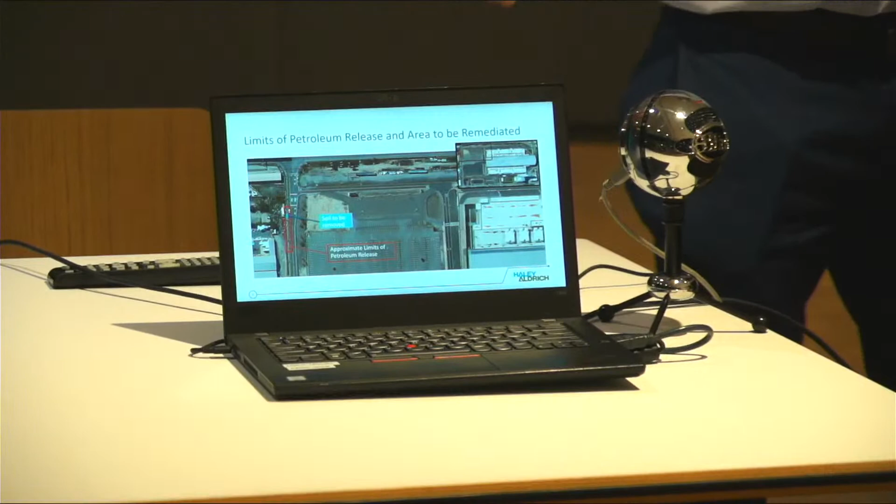So where are we on this one? Okay, this is going to be tough to see, but what we're here to talk about today is a release of petroleum, a historic release of petroleum. It appears to be a number 6 fuel oil. The number 6 fuel oil is very thick, heavy, viscous oil, think molasses almost, and it's not a very volatile compound, meaning it doesn't give off vapors. It's located in New Cypher Street. The limits of the release are shown on this picture in the red box, that's the limits of the release. And the small blue box is the area that we're going to remediate, and I'll go through why we're remediating just that area in a little bit.

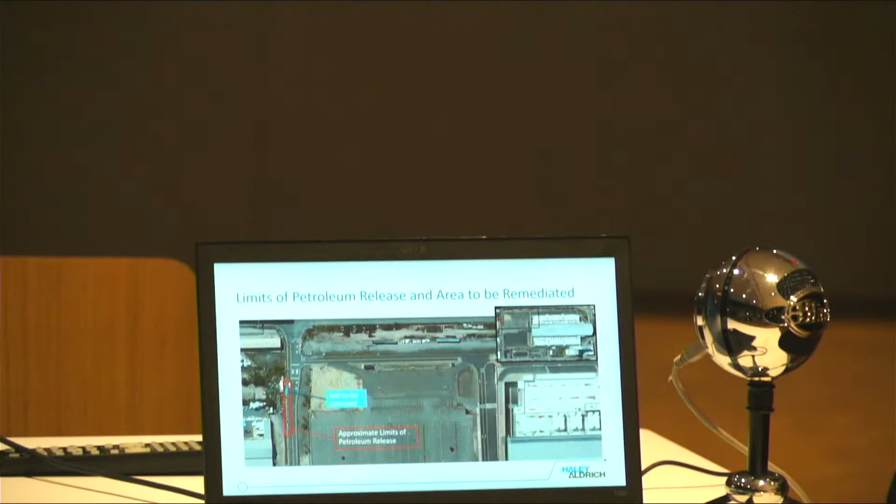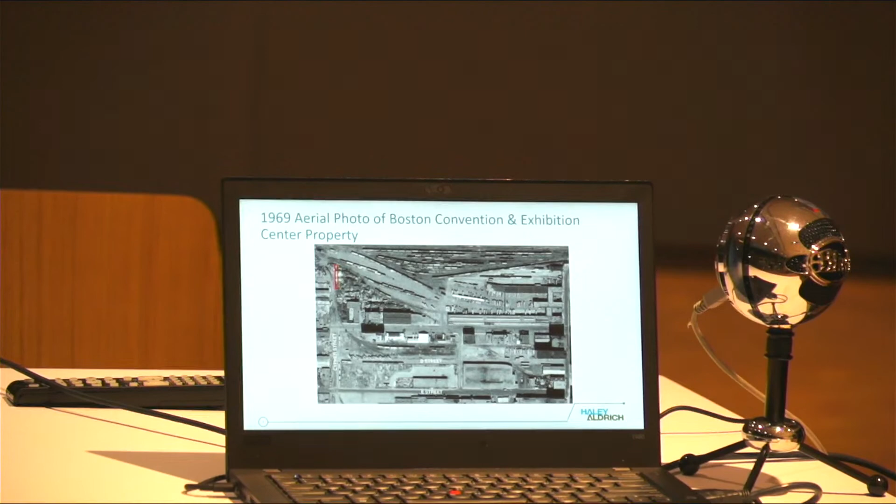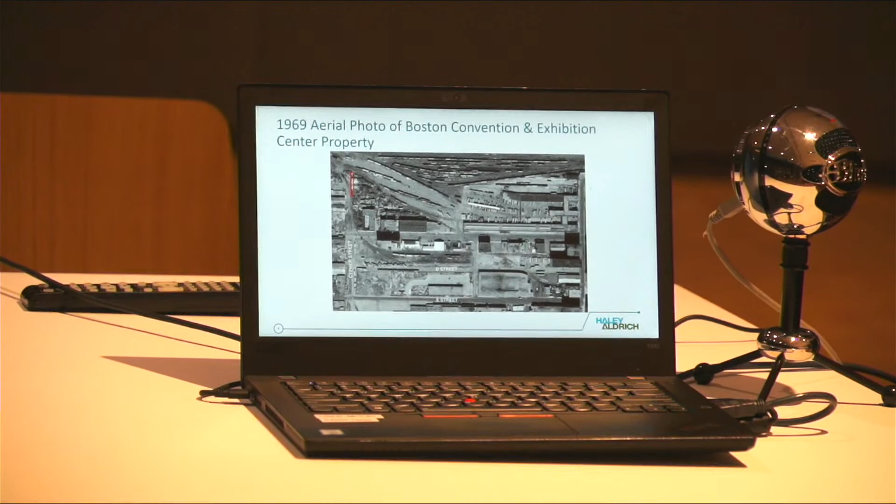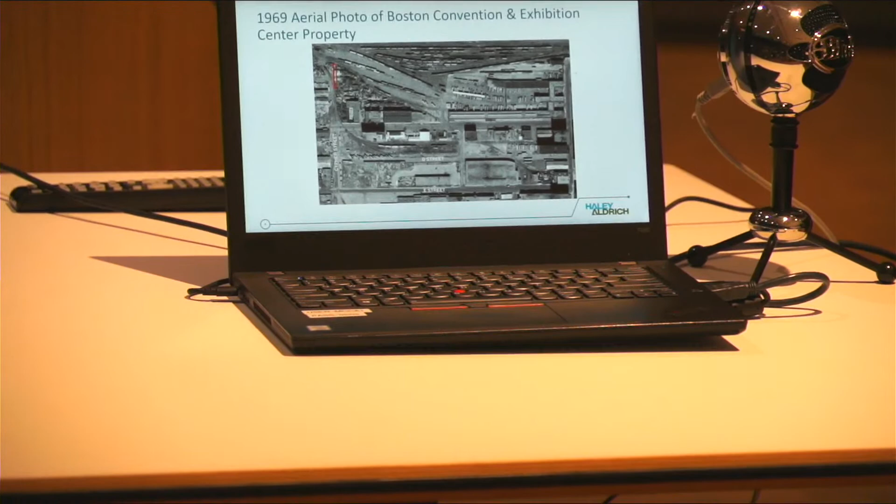So on the next page, the location of New Cypher Street and where this petroleum release is happens to coincide with the former Boston junk site that was here. It was a junk mill facility that would recycle transformers, and it was the place where transformer oil was released containing PCBs, and the location at which the MCCA did a very big cleanup in 2017. So it just kind of gives an idea of the industrial history of this area and where it's located in the past. It's next to these railroad operations, the junk facility itself, and that's likely the source of this petroleum.

So a little bit about the regulatory setting. This particular remediation is being regulated by both the U.S. Environmental Protection Agency and the Massachusetts Department of Environmental Protection. The EPA's regulation falls under what's called the Toxic Substances Control Act, related to the PCB release that was previously cleaned up. There's still residual PCBs in the ground, so whenever we manage those soils, we need to work with EPA and within their framework to do that remediation.

We notified EPA of this work back in 2022. They understand what we're doing and have agreed and approved it. We just need to send the closure documentation when we're done. The soil out there, the residual PCBs, are underneath the asphalt cap that surrounds, that is beneath a lot of the south lot in New Cypher Street. It's called the EM1 cap, for exposure mitigation cap.

The other regulatory authority overseeing this, and really the primary regulatory agency for this particular release of petroleum, is the Massachusetts Department of Environmental Protection. They work under the Massachusetts Contingency Plan regulations, and we reported this release to them in 2017. Since that time, we've done several investigations, and we submitted a remediation plan to Mass DEP in 2023. Though they don't approve these plans, that's where I come in as a licensed site professional. I have a license to render an opinion that we've designed this remediation in accordance with the state regulations. DEP, of course, can review it, audit it, tell us no, you're not, ask us to do different things. But in this case, we have not heard from Mass DEP on this, so it is considered a presumptive approval.

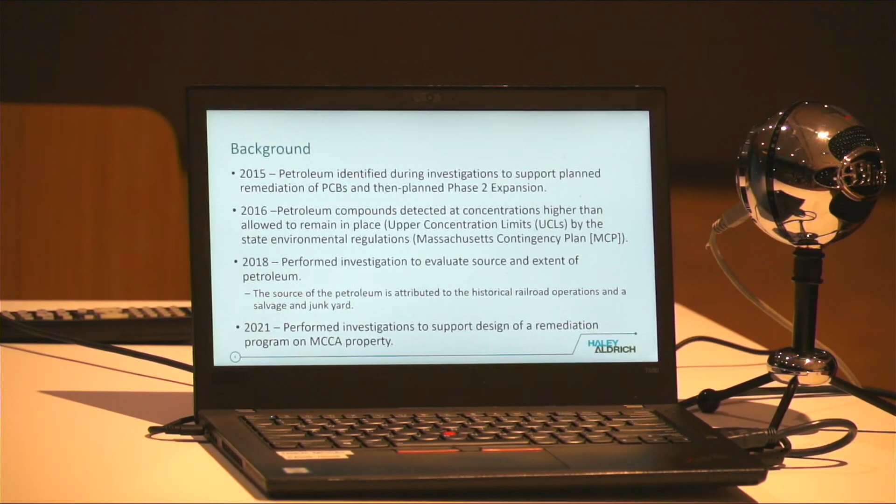All right, so a little bit about the background of how we found this release. In 2015, Haley and Aldrich did some investigations in the south parking lot in New Cypher Street for the planned expansion, the Phase 2 expansion of the convention center at that time, as well as to remediate PCBs while that construction was going on.

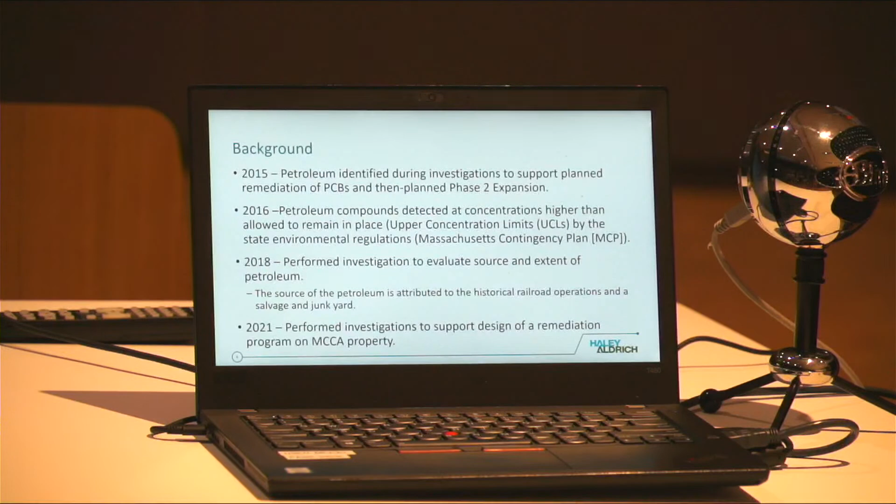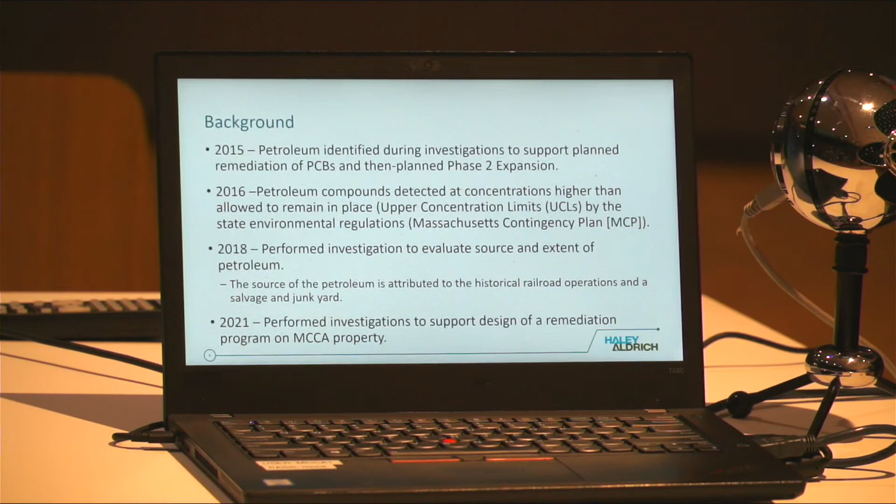During those investigations, we did find some isolated areas of petroleum that warranted more investigation. This site under Cypher Street was one of them. So we went back in 2016 and did some more testing. What we found at one sample location was that the concentrations of petroleum compounds in soil were above what's allowed to be left in place under Mass DEP regulations. What they call this, the upper concentration limit, is what Mass DEP refers to that as.

So in 2018, we went back out again to do a little more investigation to find out what's the source of the release, how far does it extend. We kind of did a broad brush on this one. What the 2018 investigation told us was that there was no particular point source. It appears to be related to the historic industrial operations of the area, the junkyard, the railroad facility, and that basically the top 10 feet was clean of petroleum, and we really found the petroleum deeper, indicating it was a historic release.

So again, we went back out in 2021. We did some more investigations to really refine the extent and help us evaluate what remedial options we had to get rid of the petroleum that was down there.

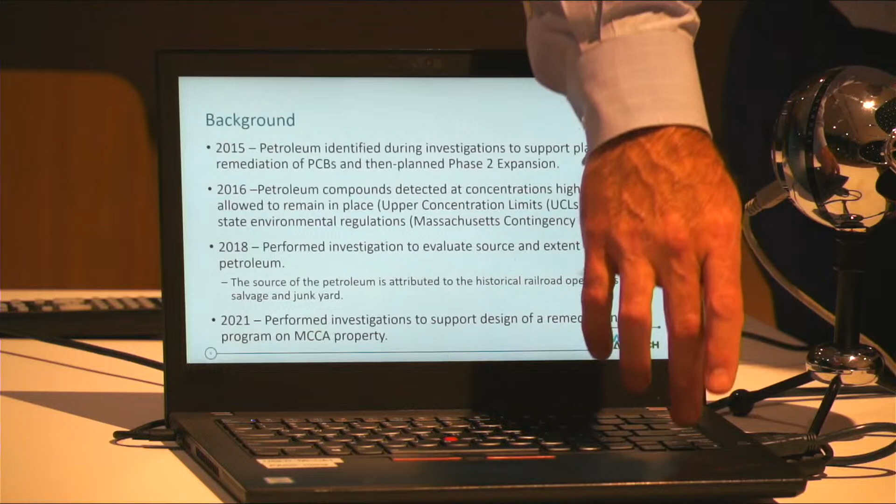So in 2022, we evaluated remedial options. The MCP requires us to take a look at different options. What options do you have to remediate this soil? One of those options we have to look at, and we did, is what's called a no-action alternative. What if we just left the petroleum in place? That would not help us achieve site closure. So we did not keep that option.

We looked at excavation. Excavation of about a 350 square foot area to remove those concentrations of petroleum that exceed the upper concentration limits, the allowable limits. And the last option we looked at was called an engineered barrier. That also leaves the contamination in place, but it leaves a barrier over the surface similar to the EM1 cap that's there now. That allows you to get to site closure, but it doesn't actually remove the contamination. And it's also a last resort option. If there's a feasible option to remove the contamination, you take that option.

Just to explain site closure: site closure means what we get is called a permanent solution under the Massachusetts Contingency Plan. It means you've cleaned it up to an acceptable level of risk for the environment and for human health.

Because the engineered barrier is a last resort option, we do have a feasible option of excavation. We selected excavation, which is what we're doing at this point.

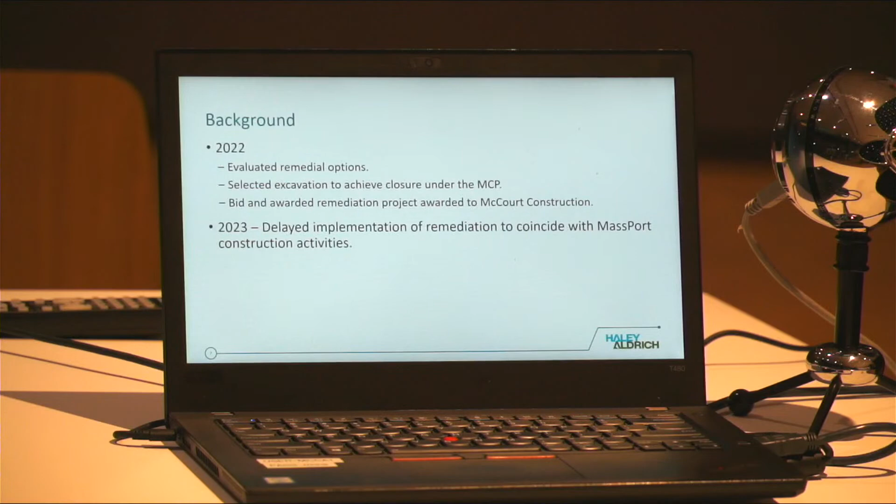So why are we remediating? We're remediating to remove those upper concentration limits, the amount that's not allowed to be left in the soil. The testing has told us that groundwater has not been significantly impacted by the release. The groundwater concentrations are below risk thresholds and wouldn't even constitute a reporting condition under Mass DEP's regulations.

In 2021, we did an evaluation of the risk compared to 4 different elements that the MCP, the Massachusetts Contingency Plan, requires us to look at: human health, public welfare, safety, and the environment. The outcome of that risk told us that we do not exceed the risk levels for human health or for safety. However, we do exceed the risk levels for public welfare and the environment.

Public welfare means does it cause nuisance odors or does it result in a lesser use of the property. We don't fail for those reasons, however, along with public welfare comes the upper concentration limit. That's also a trigger. So the upper concentration limit is the reason why we did not pass the risk levels for public welfare. Similar to the environment.

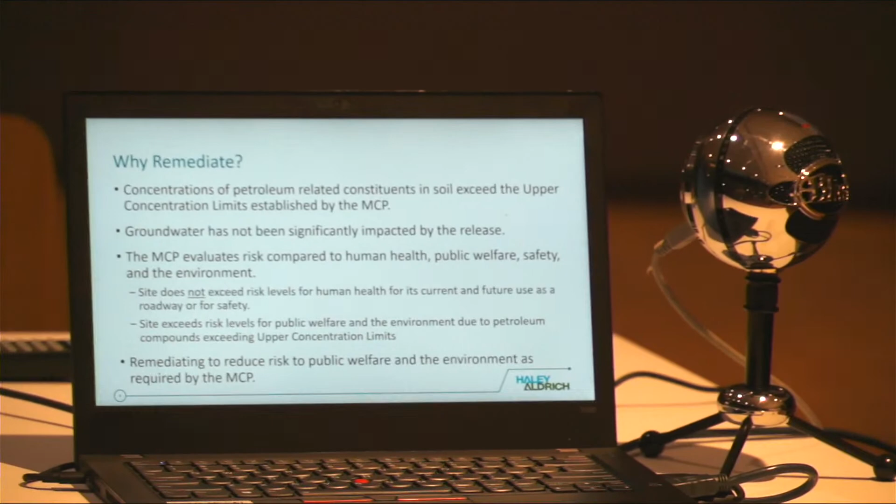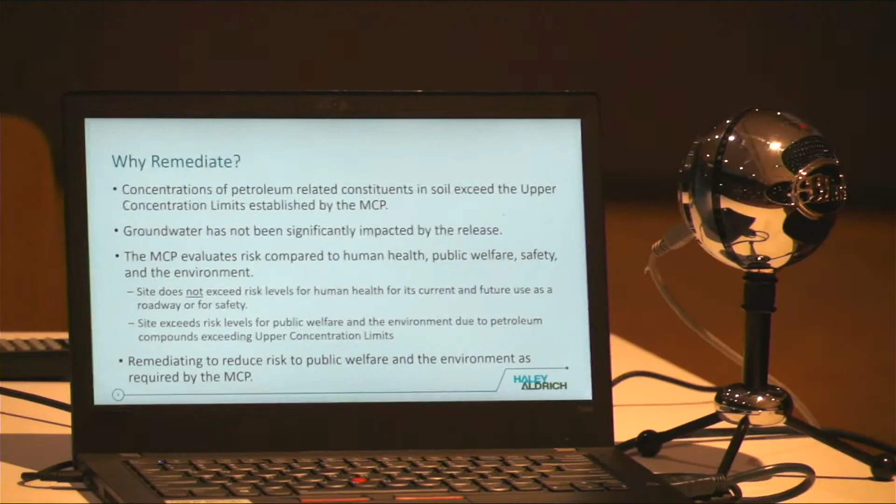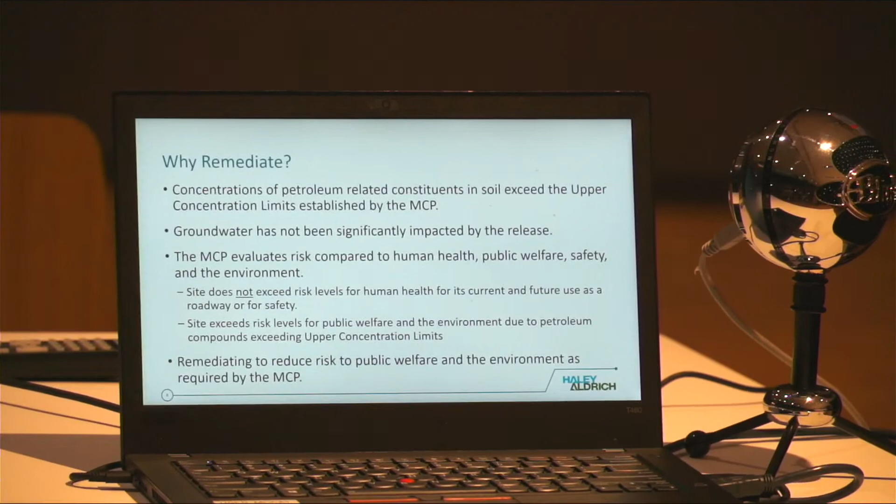The environment includes looking at sensitive receptors such as drinking water sources or fish habitats, based on the proximity of the release to those, but also includes an upper concentration limit requirement. So we did not trigger any of the sensitive receptors. We're not in a drinking water area, and we're not close enough to a fish habitat to pose a risk. It's really just the upper concentration limit, and that's what we're trying to accomplish here today.

So I'll just go through a quick overview of what we're doing out there.

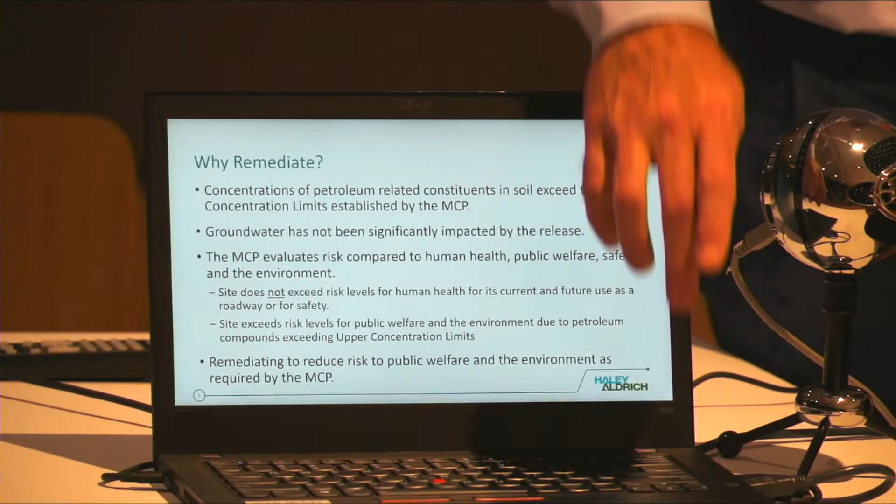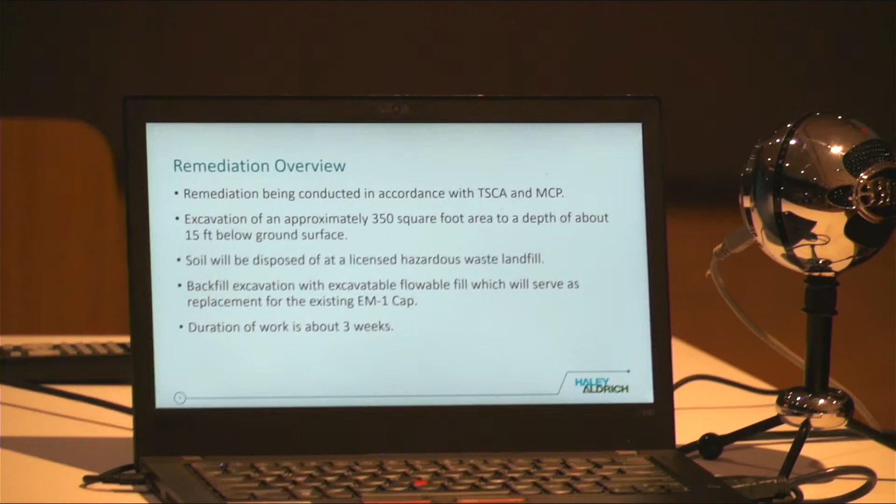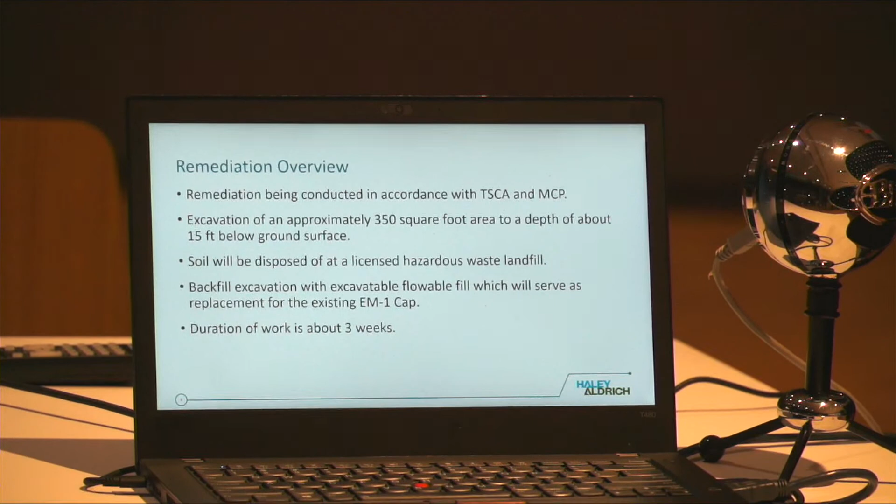The remediation has been designed and will be conducted in accordance with the 2 overseeing regulatory authorities, the EPA and Mass DEP. Essentially we're excavating a 350 square foot area down 15 feet below grade, which is the limit of those upper concentration limit exceedances. The soil will be excavated, placed into trucks, and disposed of at a licensed hazardous waste landfill in Michigan.

Then we're going to backfill the excavation with something called flowable fill. Flowable fill is like a concrete, but it's excavatable, so it's going to be one large concrete block that can be excavated but can't be dug through. By putting the concrete in there, it completes the cap that is going to be removed to get to the soils, and then puts the cap back in place.

The duration of this work is 3 weeks. We think on the higher side, probably a 2 to 3 week duration to complete this work.

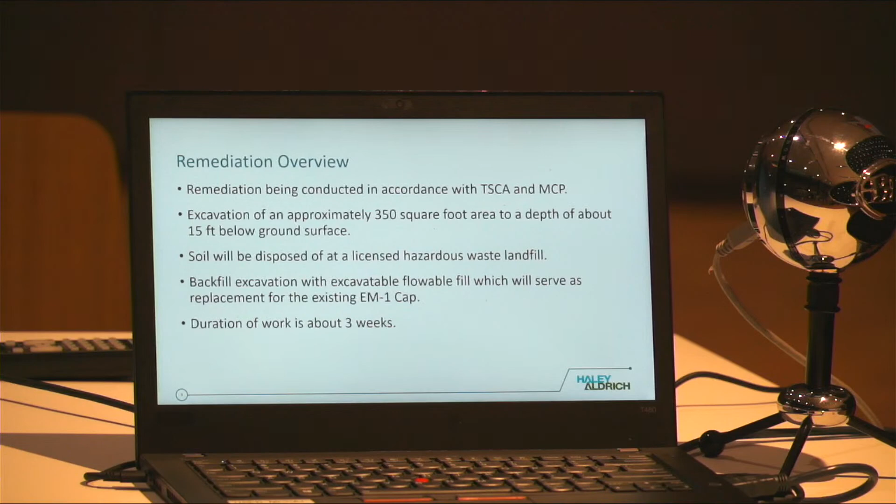The next 2 images on your slide deck show the excavation, though they may be quite small. There's a cross-hatched area which shows where the pavement will be saw cut, and within that cross-hatched area is a singular diagonally hatched area, which is the excavation area, again about 350 square feet or so. This plan also shows some of the erosion control measures that will be put in as required, and a decontamination station, or truck wash.

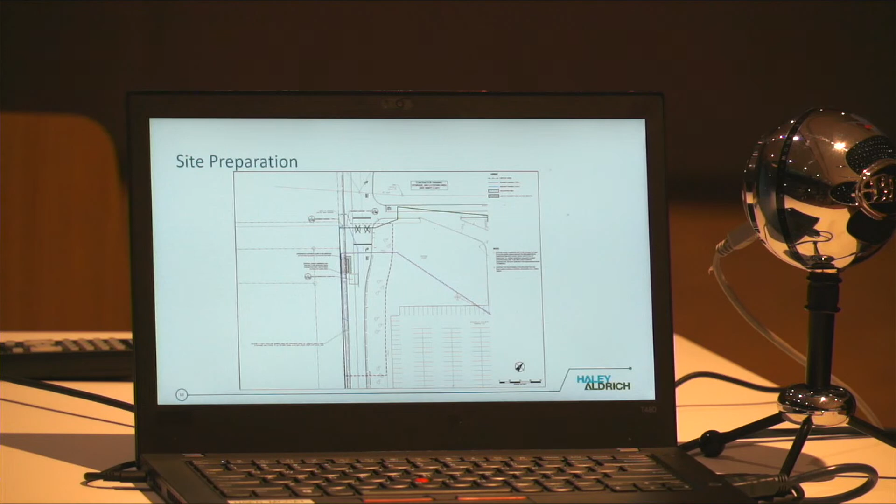It's where we can wash the wheels of the trucks before they leave the site. The next image shows a profile view on the bottom of the excavation, just to give you a visual of what it would look like through a slice through it. The two red bars on the side are the excavation support system.

McCourt will be installing something called a slide rail system. It's basically walls on four rails that'll be slid down as the excavation progresses to hold the earth back so they can safely excavate the soil. And then it'll be backfilled with that clean, flowable concrete fill material, and that'll be brought up to surface grade.

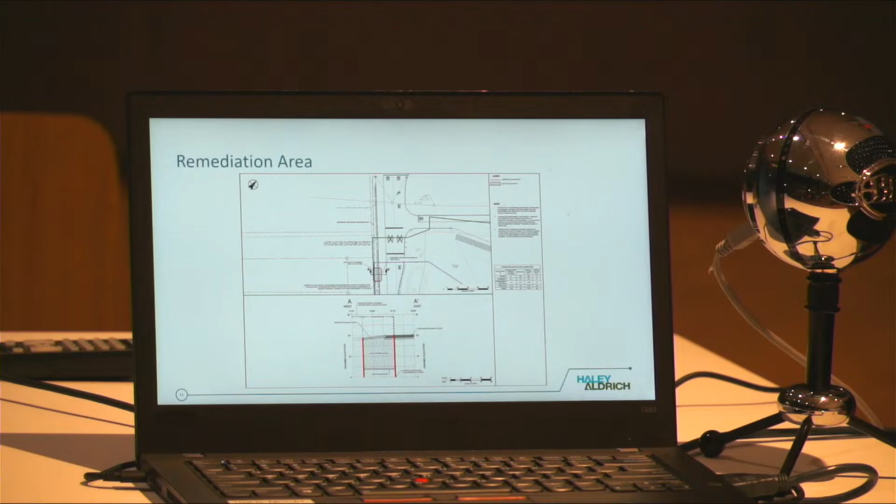So now on to the safety measures that we're taking. As you know, right now the site, all of Cypher Street here, is restricted access. There's a fence up there with a scrim on it to keep people out. That's one of the safety measures. But McCourt has also prepared a site-specific health and safety plan. They've been given the chemical data from the petroleum, from all the samples we've taken, and put together a plan that is protective of both their workers' health and safety, and also the surrounding populations as well.

The soil is going to be excavated and live loaded directly into trucks. There will not be stockpiling of contaminated materials. Those trucks will then go through that wheel wash where they're going to wash off the sides and wheels of the truck, just to minimize the chance for any tracking of soil off of Cypher Street and onto the public roadways. Then the trucks will exit to the west, outside of the Haul Road right out here, and be able to get to the highway from the Haul Road.

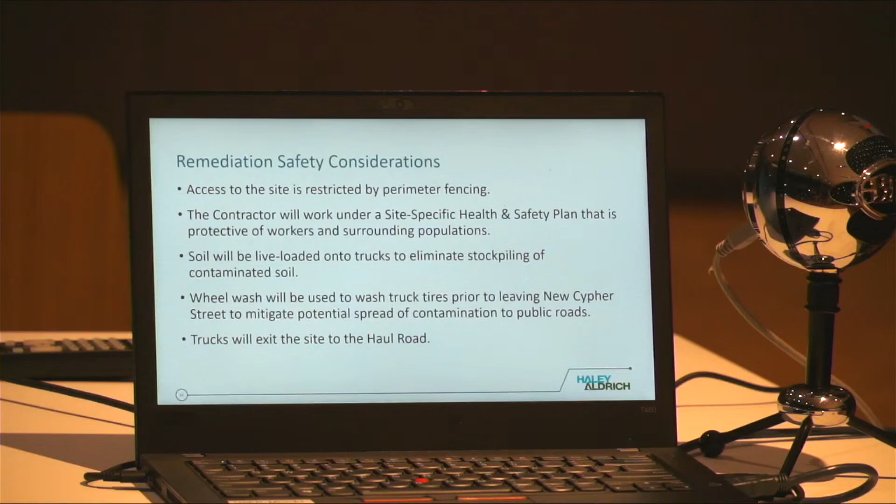We will also be on site doing monitoring of the air as the excavation is conducted. We'll be monitoring for both volatile compounds and for dust. For volatile compounds, think of when you look at gasoline, you see the waves coming off the gasoline, you can smell it—that's it volatilizing into the atmosphere. Number 6 fuel oil isn't really volatile. It's a very thick, heavy liquid. It needs to be heated to even move, so it doesn't really evaporate.

We're not anticipating seeing much in the line of volatile organic compounds in the atmosphere, but we're going to monitor it continuously. We've set an action level where if that level is exceeded, the contractor will need to implement mitigation measures, which can be stopping excavation, placing polyethylene over the excavation to stop the volatilization, or using a foam to cover that so it does not volatilize as they're doing the work. We'll assess the work continually as we go on.

Another thing we'll be measuring for is dust. We'll have two dust monitors that continually measure particulates in the air, one upwind and one downwind, so they'll change based on the wind direction during the course of the day. They monitor continuously, and we've set risk-based action levels for those dusts.

We've set a risk-based action level of 150 micrograms per cubic meter for dust, which probably means nothing to you, but that's really where you start to see visible dust in the air. These dust monitors have alerts on them, so we can get a trigger before that occurs, warn the contractor we're approaching our limits, and implement mitigation measures before we hit that level—spraying the excavation with water to keep the dust down, or stopping and reassessing the work that we're doing.

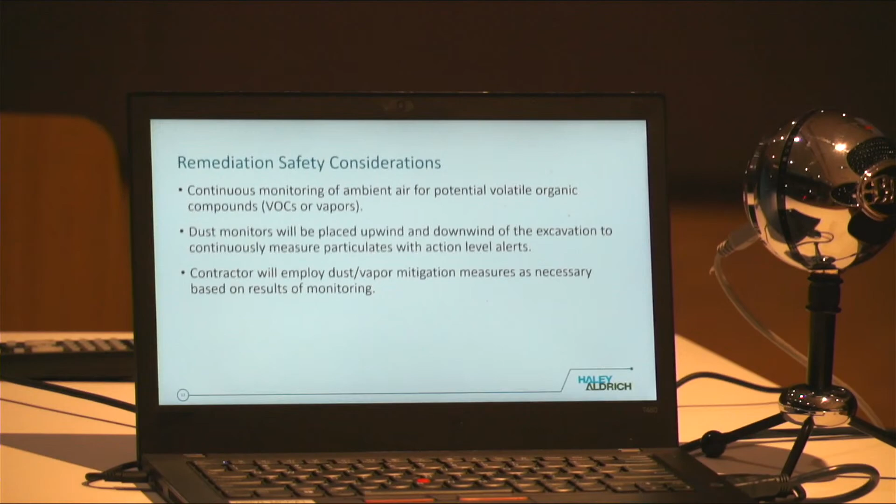So I'm a little map challenged—can you go over where the site is? I want to understand where the work you're doing is, in conjunction with the work McCourt is doing now. So it's on this end of Cypher Street, down this end, not closer to D, closer to the bypass road. Approximately it's closest to B Street, not to C Street—right in that region, just after B. If you were to walk down B Street and look at the bypass road, it'd be just to your right, almost right across from the West Service Road.